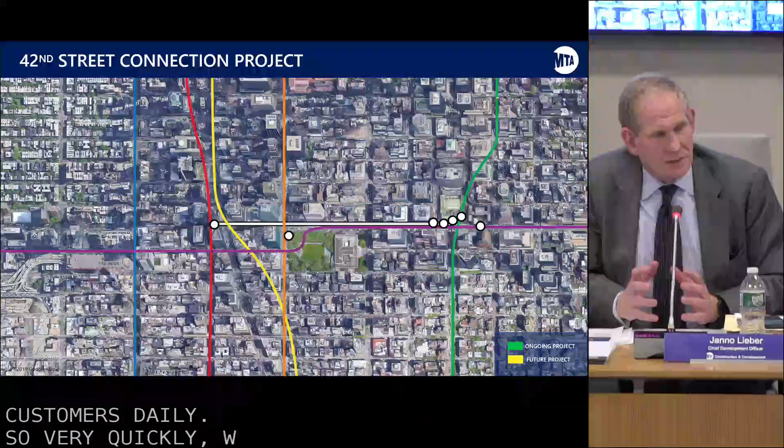So very quickly, what we did: obviously the Times Square shuttle is a centerpiece of this effort, making sure that it can become ADA accessible and can carry more passengers, and that we can deliver all of that without making it unusable in the meantime, which is a bit of a challenge because it is so heavily used every day. And in Grand Central, where there's a real problem of vertical circulation, both from mezzanine to platform and from street to platform and street to mezzanine, in every case we're getting significant additional capacity in vertical circulation, including several additional fare arrays.

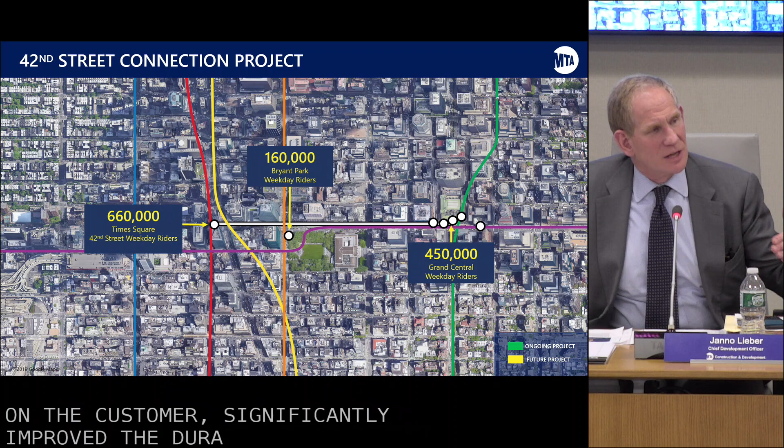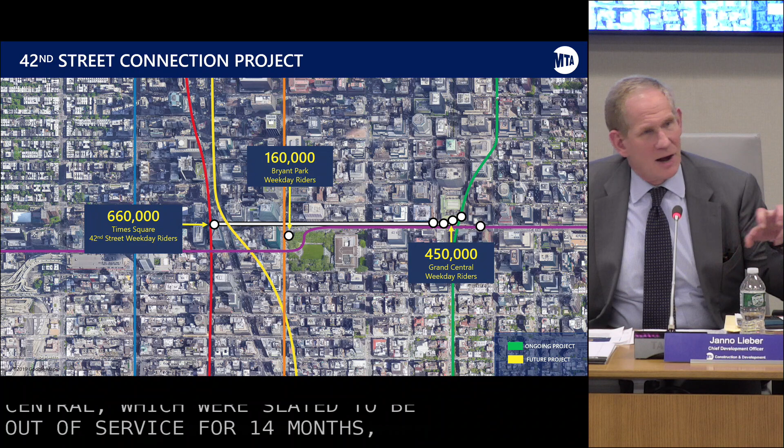So we're going to show you all the details, and one thing we're proud of, and hope we'll be able to replicate again and again, is that we took a project with a lot of different components and managed to cut back key elements by an average of 30 to 40% in duration. We saved a little money, but equally important, because of the impact on the customer, we significantly improved the duration. One element is that the escalators coming out of the 42nd Street Passage in Grand Central, which were slated to be out of service for 14 months, are down to 8 months, and that entire stair configuration is being handled in a much shortened time.

It is disruptive right now, but it is being managed, and thanks to the folks at Transit, we've worked closely with Andy and his team. And with all that preliminary, I'm going to ask Mo Solomon to take it away, quickly.

Thank you, Janno. I'm going to recap some of the points you made really quickly and walk everyone through some of the projects. I'm going to start with the 42nd Street shuttle. Some basic facts about the shuttle: we have 100,000 customers riding the shuttle daily, and we connect east and west subway lines.

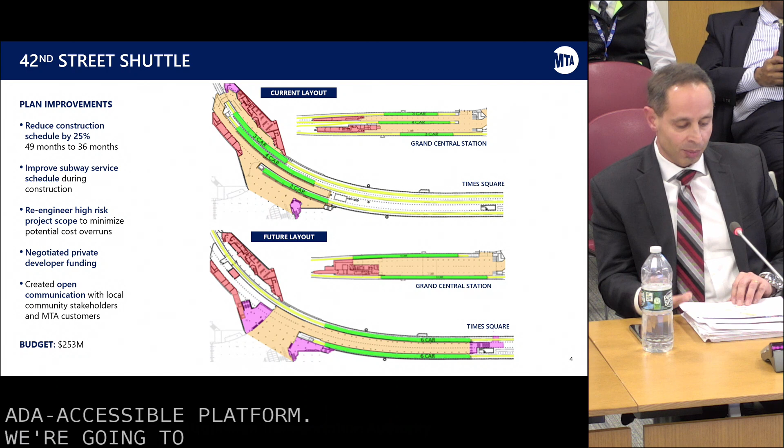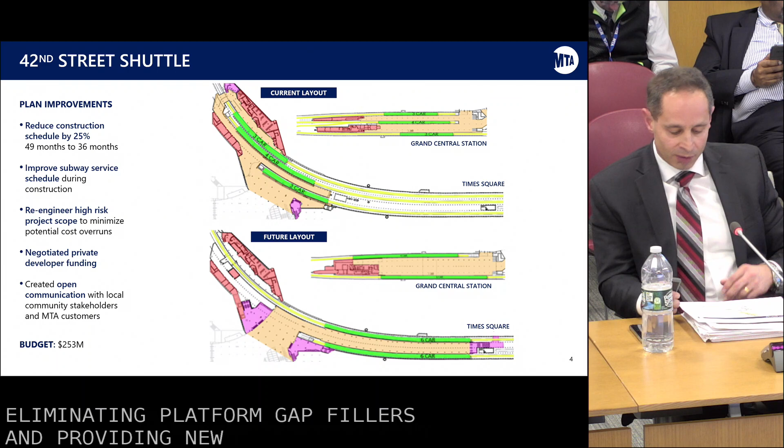Under the scope of this project, we are going to provide a new ADA accessible platform. We're going to increase subway car capacity by 20%, and we're improving system reliability by eliminating platform gap fillers and providing new rail systems. The project is currently underway, and we've improved the schedule by 25%. One of the key things we've done is re-engineer high-risk project scope, and we've negotiated a $7.5 million credit with the developer, something we're very pleased with. The project is currently on budget and on schedule.

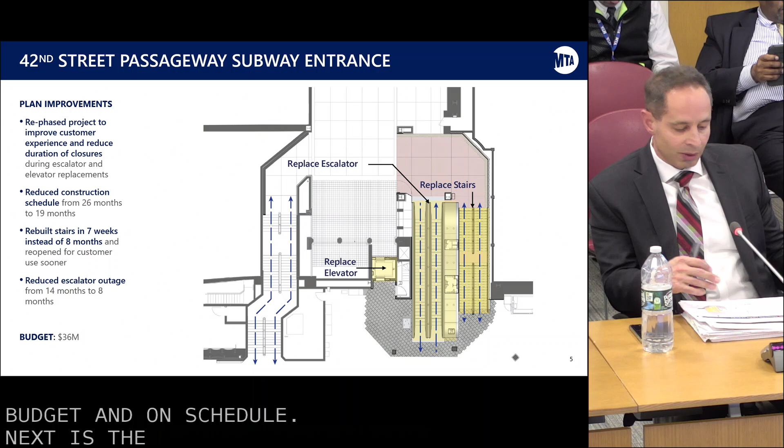Next is the 42nd Street passageway subway entrance. Another ridership fact, because this area is just very high volume: there are 180,000 customers that use this station entrance over by Grand Central on a daily basis. That is 60% of Metro North's entire daily ridership, so it's very high volume.

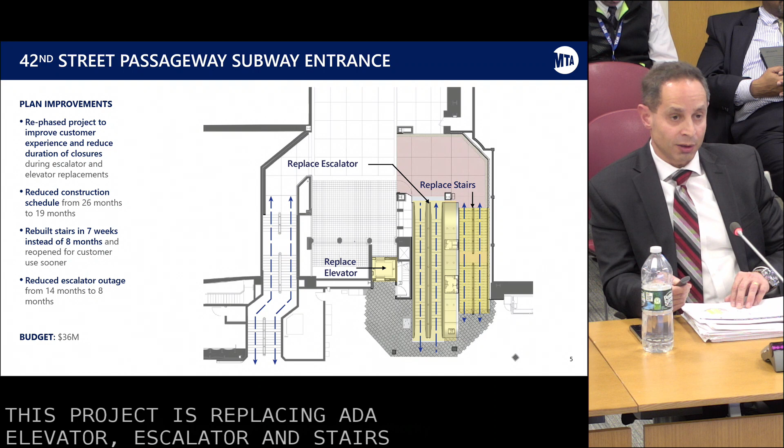This project is replacing ADA elevator, escalator, and stairs that have exceeded their useful life. Again, this project is also underway, and we've reduced the schedule by 25%. We've also reduced some of the phases of the project: we reduced the schedule phasing of the stairs by 75%, and we've reduced the escalator closure by 40%. The rephasing of the projects definitely improved customer circulation and customer experience.

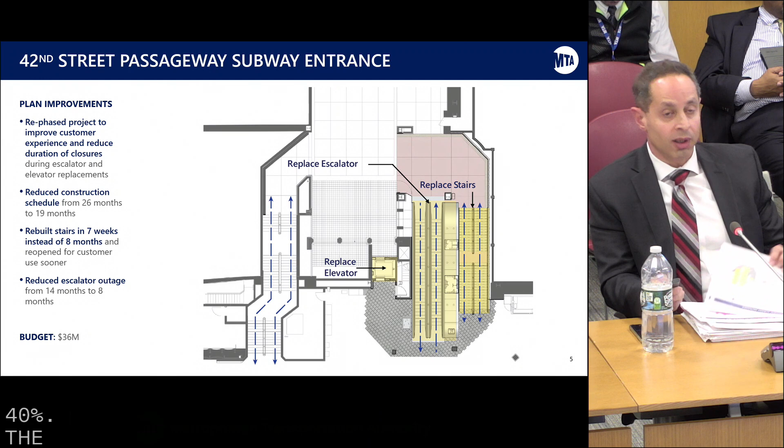That's literally the busiest entrance in our subway system. It's an unbelievably challenging location.

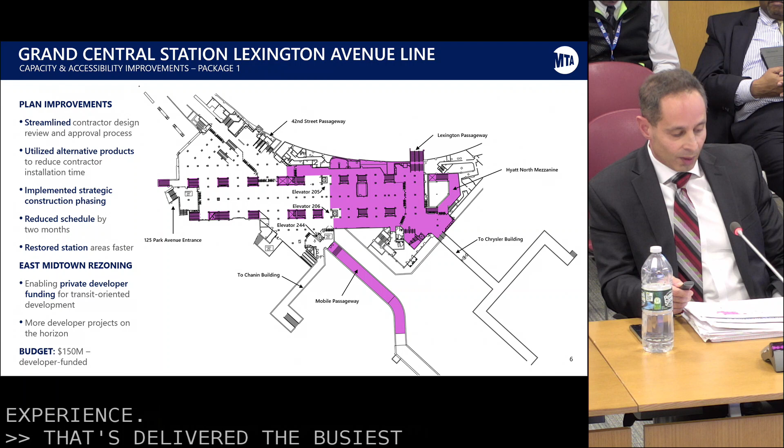Next is also at Grand Central Station on the Lexington Avenue line. We have an important developer-funded project providing much-needed capacity improvement to New York City Transit's second flagship location.

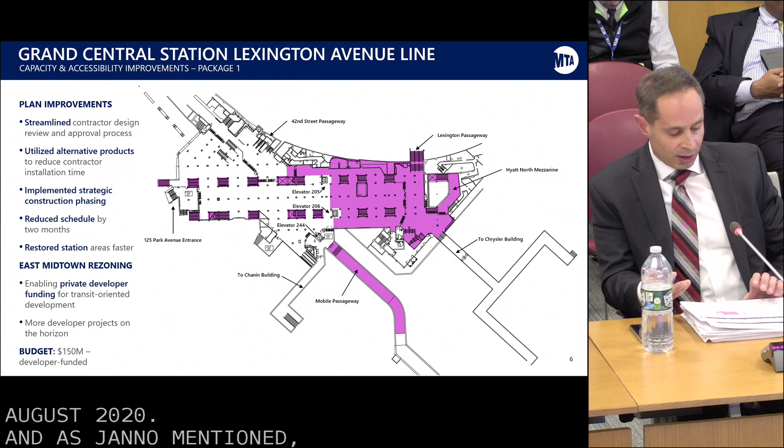As Janno mentioned, this project was made possible through New York City's East Midtown rezoning initiative, and there's more of that coming in this area.

Next is the other half of the Grand Central mezzanine. The One Vanderbilt project funded the north side of the mezzanine, and now we have a plan for the south side.

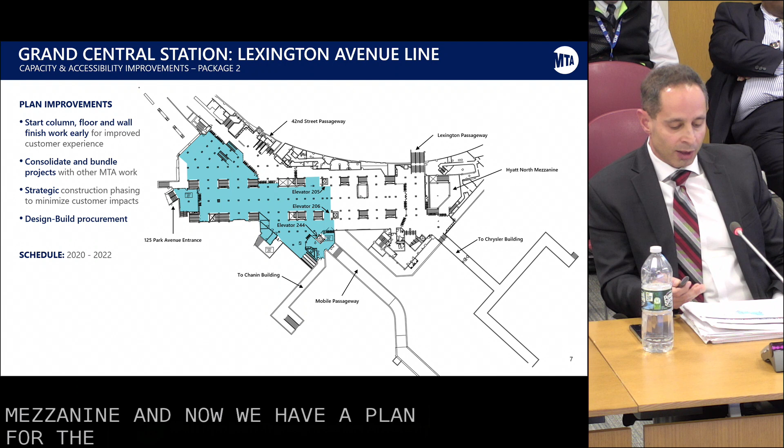We have an upcoming project to complete the work and transform this station into a world-class space. We're going to bundle that work with our overall connection project as part of our Better, Faster, Cheaper initiative.

We've already started this work. We've negotiated an agreement with the developer to rescope some of their program so that we can get the work going as quickly as possible.

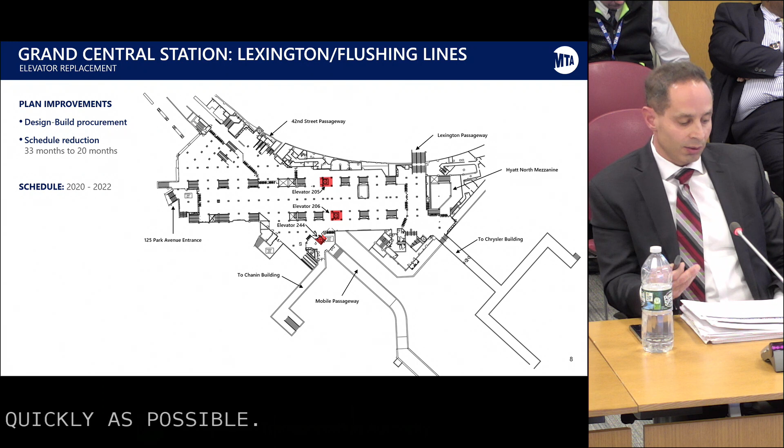At this same station, we're also going to replace 3 very important elevators. These elevators provide access to the Lex line platforms and to the Flushing line platforms. They're frequently used and need to be reliable.

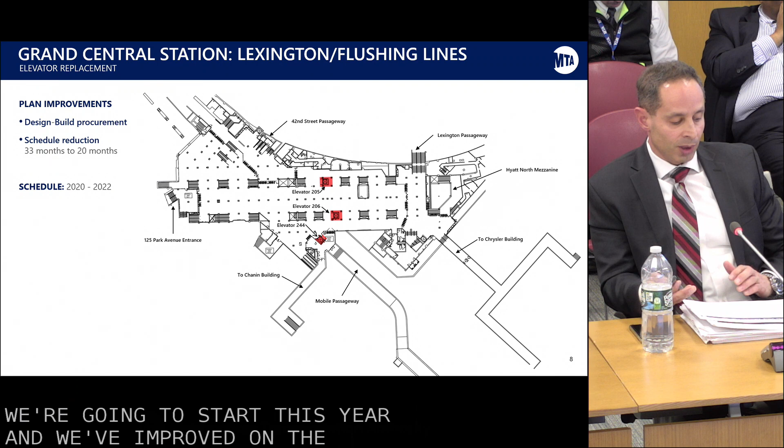They've passed their useful life, so we are moving very quickly to get these elevators replaced. We're going to start this year, and we've improved on the schedule significantly. Initially we had a plan for a 33-month construction schedule, which we've now compressed to 20 months.

Also at Grand Central is a very large, sprawling complex, and we're going to talk about the Flushing line. It's one of the busiest lines in the system, and 42nd Street Station is at or near capacity.

So improving vertical circulation is a top priority for MTA, maintaining good customer level of service now and in the future. We have a plan that bundles upcoming projects to widen existing stairs and build new ones so we can continue good level of service to MTA's customers.

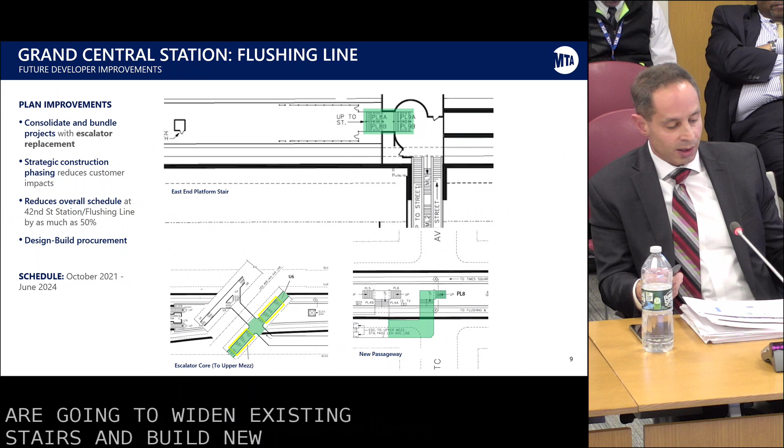Mention there's an elevator that went out of service there, which is hugely important, and we've accelerated the repair, right? Worth mentioning. Yes, that's correct. The one elevator that serves the Flushing line had a catastrophic failure back in the summer of 2019.

We moved quickly to get that elevator replaced, and we're going to have it completed by April 30 of 2020. That's the only elevator that serves the Flushing line platform on the number 7 train.

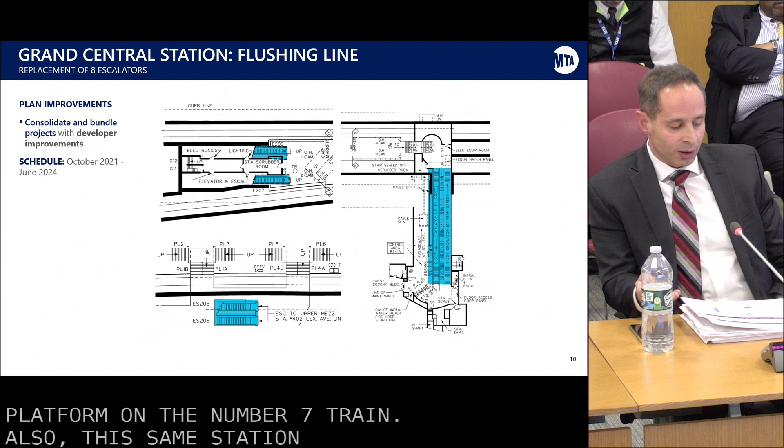Also, this same station has 8 escalators for passenger access. Because of the depth of the stations, passengers really rely on the escalators to get in and out. They're very critical at this location.

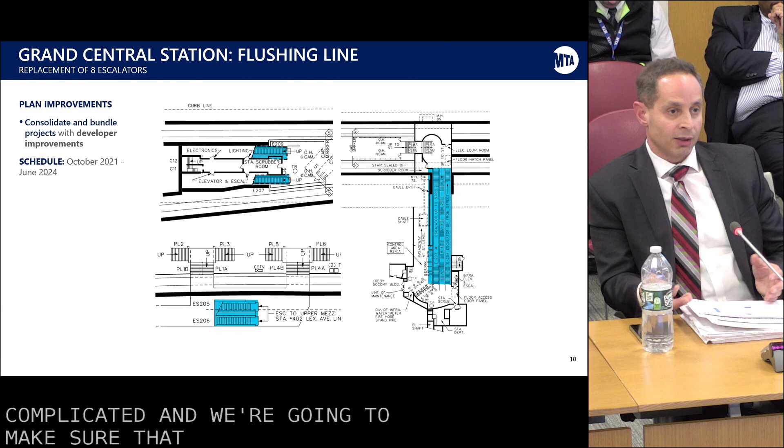So we're going to be replacing the 8 escalators that are almost at their useful life as part of our connection project bundling. The logistics of the escalator replacements are very complicated, and we're going to make sure we dovetail their replacement with the phasing of other key projects, especially the capacity improvement projects.

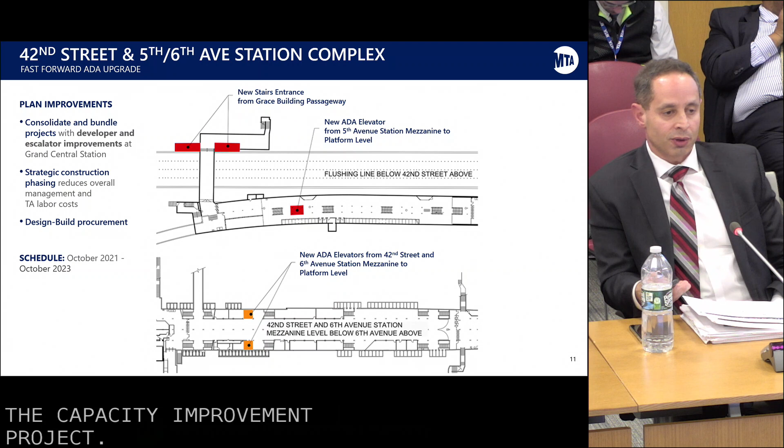Next is ADA improvements over at the 42nd Street, 5th and 6th Avenue Station Complex. This station is not quite as busy as Grand Central and Times Square, but there are 160,000 customers that use this complex on a daily basis.

Again, very high volume. We're going to make it fully ADA accessible. We're going to bundle it with the connection project, and capitalize on cost-saving opportunities with things like engineering force account and TA labor.

Lastly, you may have seen some of our new branding that went out last week. The branding is intended to provide customer-friendly and uniform wayfinding information. We've also been deploying MTA staff to provide assistance with wayfinding and crowd management, just as part of our approach to improving the customer experience.

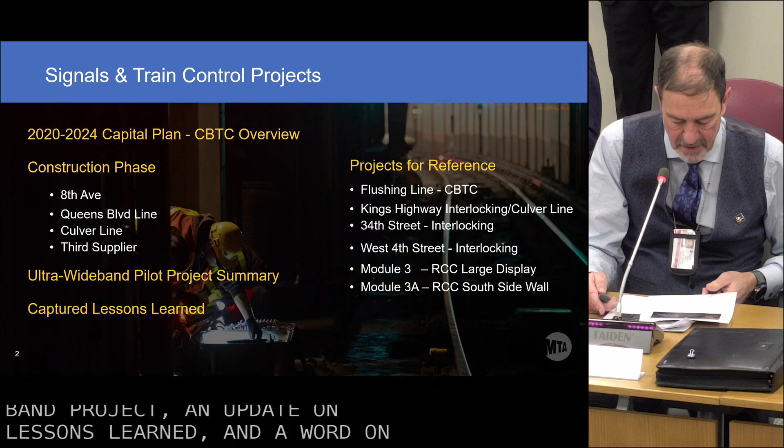Good afternoon, my name is Pete Tomlin, I'm the Vice President of CBTC Signals and Train Control Engineering for NYCT. This update will provide an overview of the 2020-2024 capital plan for CBTC, followed by updates on the 4 projects in construction, the ultra-wideband project, an update on lessons learned, and a word on the Flushing project in the closeout phase. There is additional information in the back of the pack under the projects for reference, but they're not presented here.

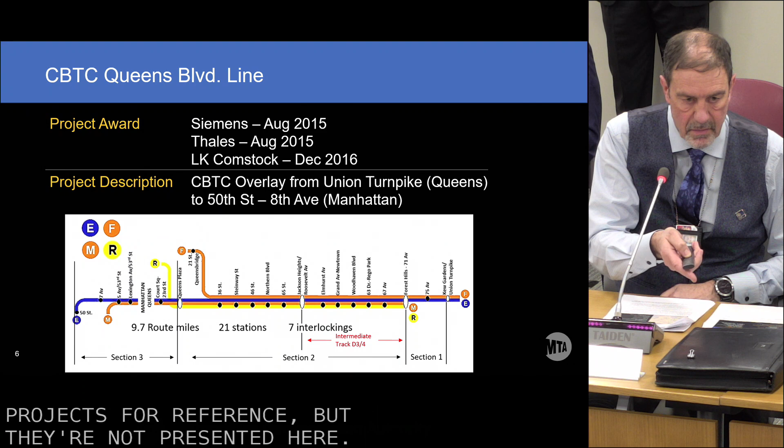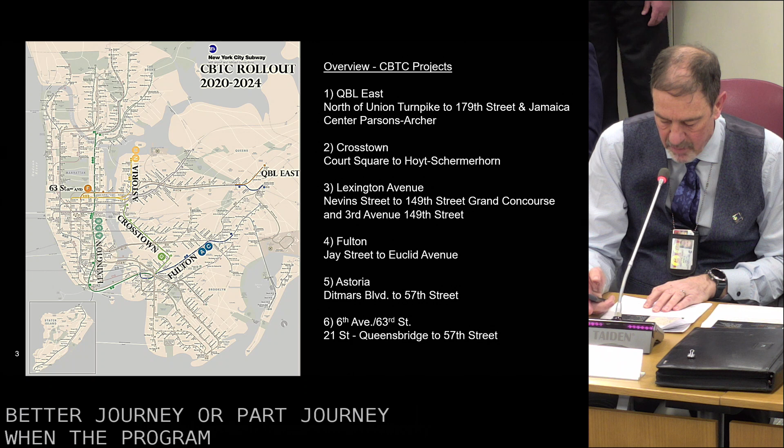The upcoming capital plan is the first major implementation of the Fast Forward plan with regard to signalling. The 6 corridors were strategically selected based on current capacity constraints and areas in need of urgent signalling renewal or state of good repair. It is expected that over 60% of our passengers will have a better journey or part journey when the program is complete. 47 of the 50 busiest stations on the subway network are covered under this plan. The subsequent capital plan starting in 2025 will bring the total line corridors upgraded to 15, with over 80% of our customers getting a better journey.

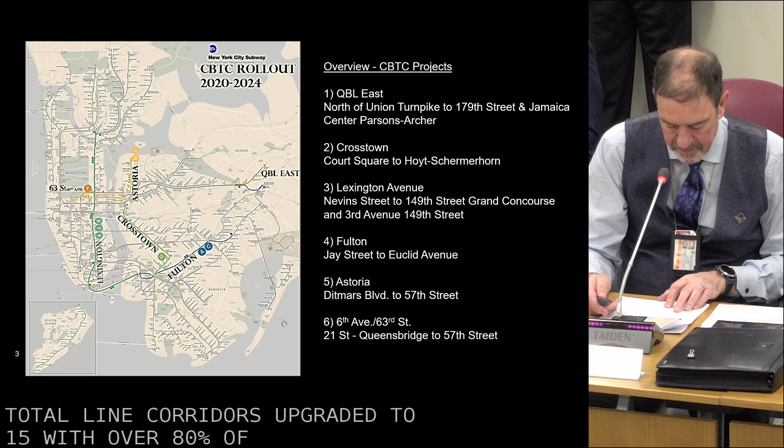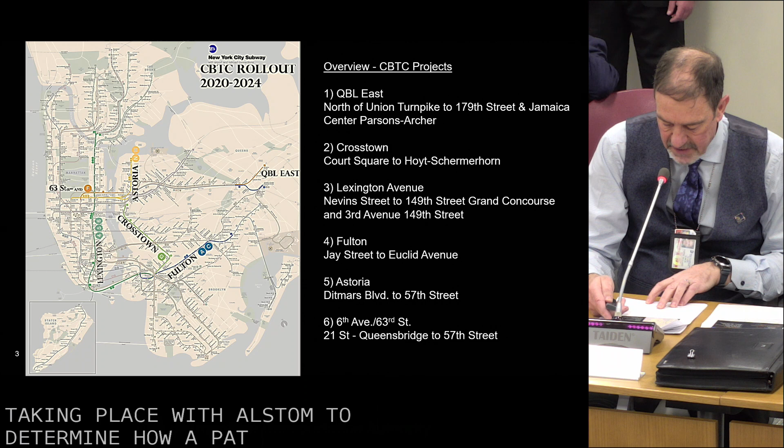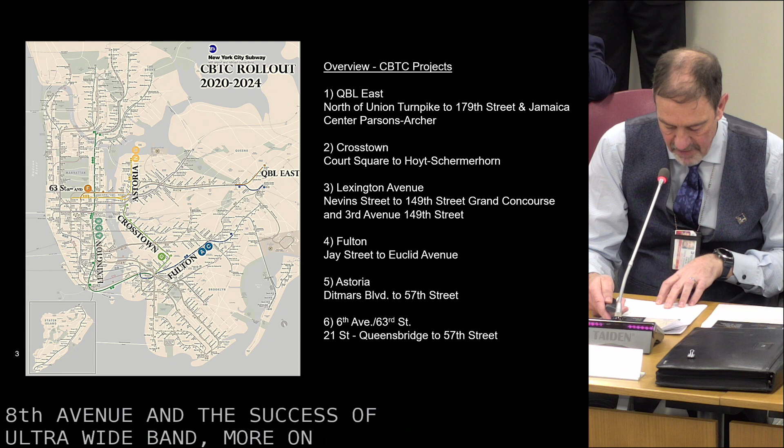This plan is the most ambitious resignaling program ever undertaken worldwide, against a backdrop of maintaining service for our near 6 million daily passengers, 24/7, 365 days a year. In support, Mitsubishi has been qualified as the third CBTC supplier, more on this later, and technical meetings are currently taking place with Alstom to determine how a path to interoperability certification can happen. Also, new innovative technologies — axle counters for 8th Avenue, and the success of ultra-wideband, more on this later — are being evaluated for use in this plan. Additionally, several other innovative technologies are being explored to see if or how they can support accelerating this plan. All of this is good news because the goal of this capital plan is to put 220 miles of track controlled by CBTC into passenger service, compared to the 43 miles over the last 20 years.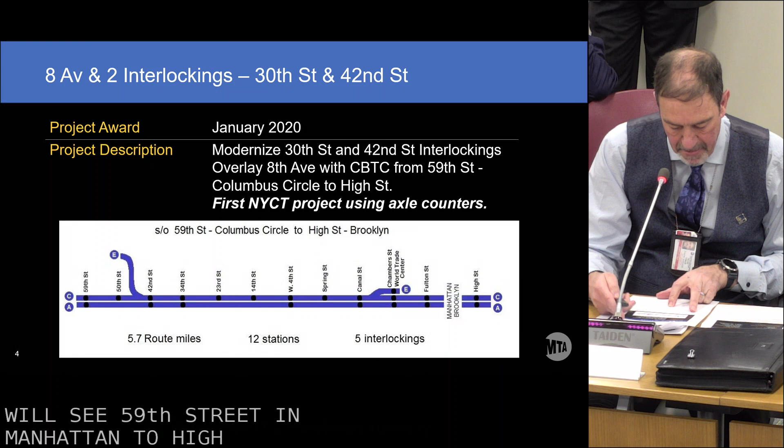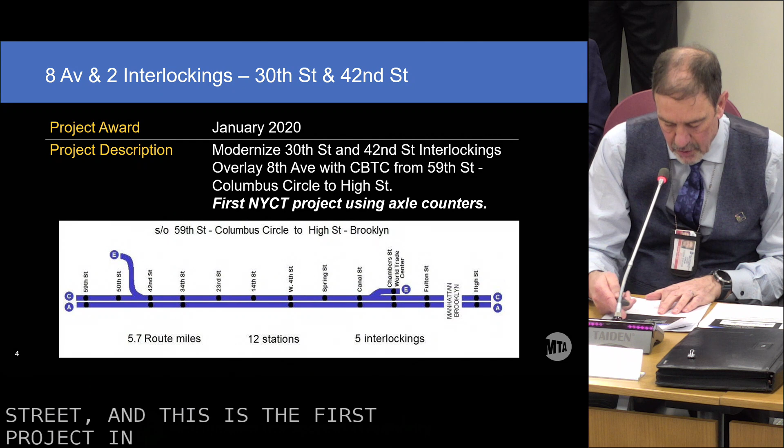The 8th Avenue project is an ambitious 60-month schedule that will see 59th Street in Manhattan to High Street in Brooklyn equipped with modern signaling technology. Also, as part of this near 6-mile-long project, 2 of the 5 interlockings will be upgraded at 30th Street and 42nd Street. This is the first project in New York to use axle counters. It was awarded to LK Comstock with Siemens as the CBTC supplier on the 11th of January this year.

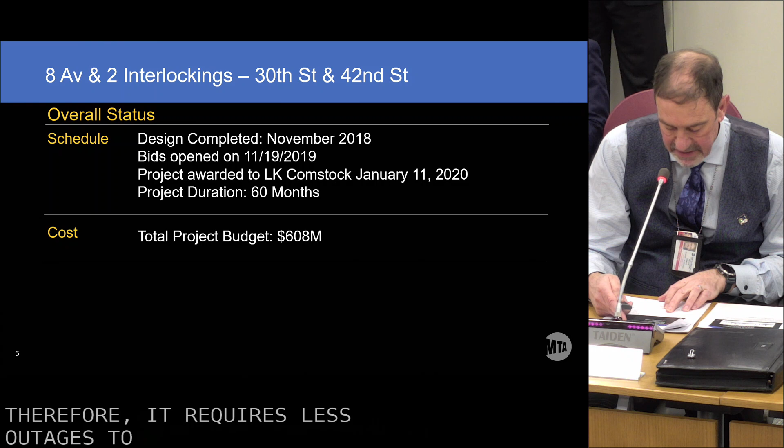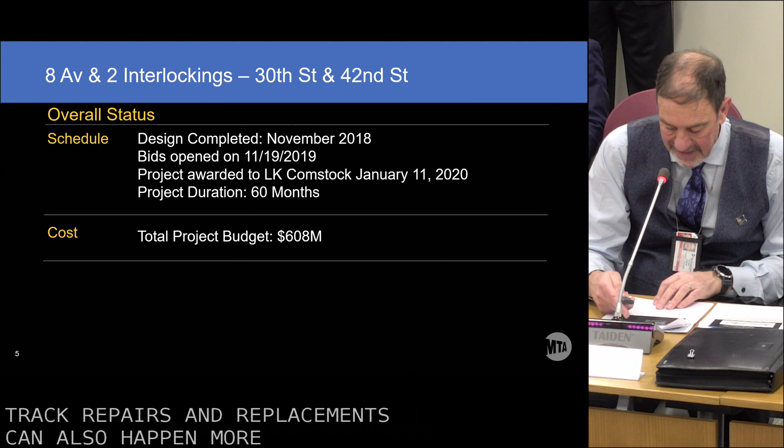The use of axle counters replaces the traditional track circuits. Axle counters help reduce delays as they use more resilient components, which are much less susceptible to water and debris. Installation is easier, less complex, and the time needed much less, therefore requires less outages to complete. This provides great savings in GOs and less passenger disruption. Track repairs and replacements can also happen more efficiently. These savings also flow down to lower the maintenance costs and lessen disruption from maintenance to our passengers.

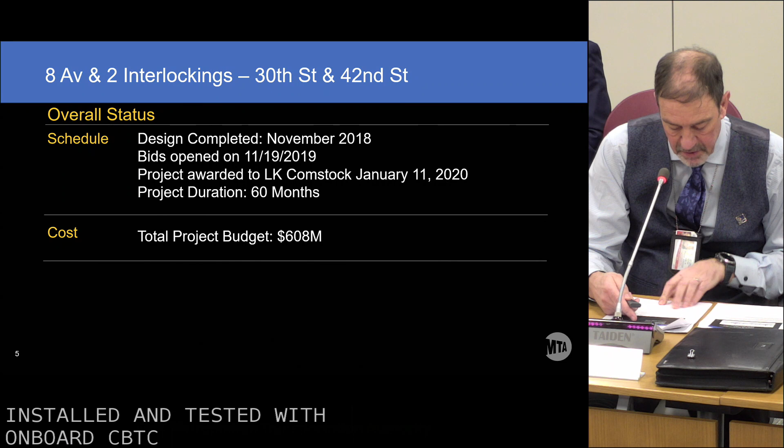The trains to support this project are the R211 Kawasaki trains that will arrive already installed and tested with onboard CBTC equipment, and the R179s already on property will be retrofitted with the Siemens onboard equipment as part of another direct contract to NYCT to support 8th Avenue. The schedules of the train deliveries and the wayside CBTC readiness are now all aligned.

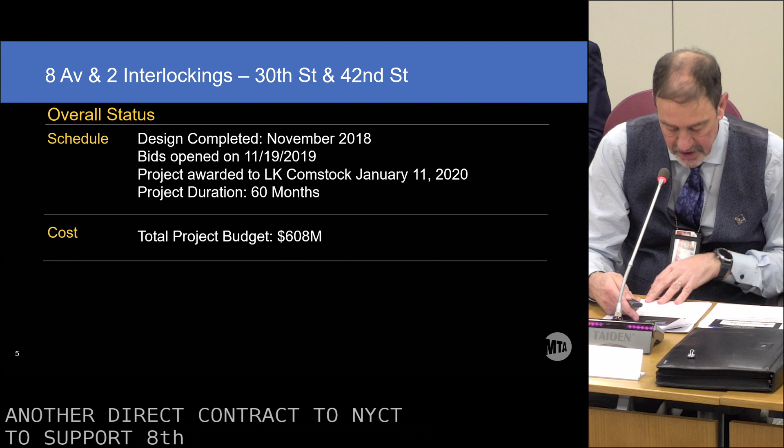Moving on to QBL West. This project is made up of 3 major contracts: 1 installer, LK Comstock, and 2 CBTC suppliers, Siemens and Thales, with Siemens being awarded 95% and Thales 5% of the CBTC portion to ensure interoperability.

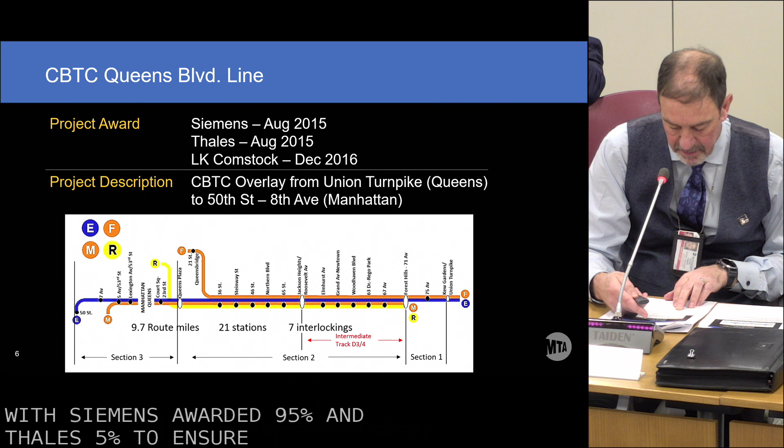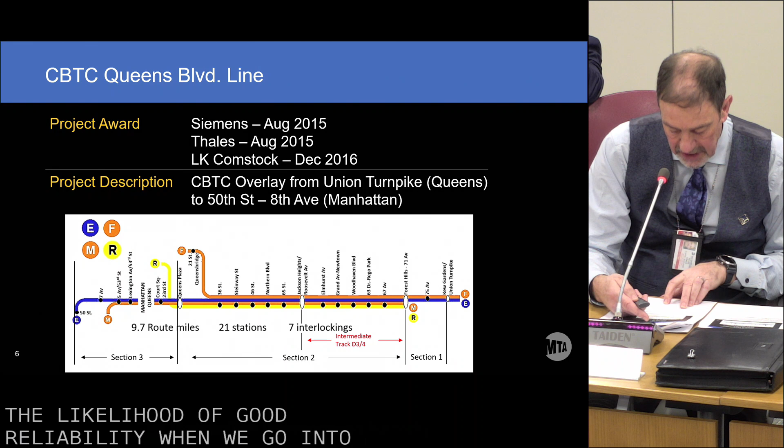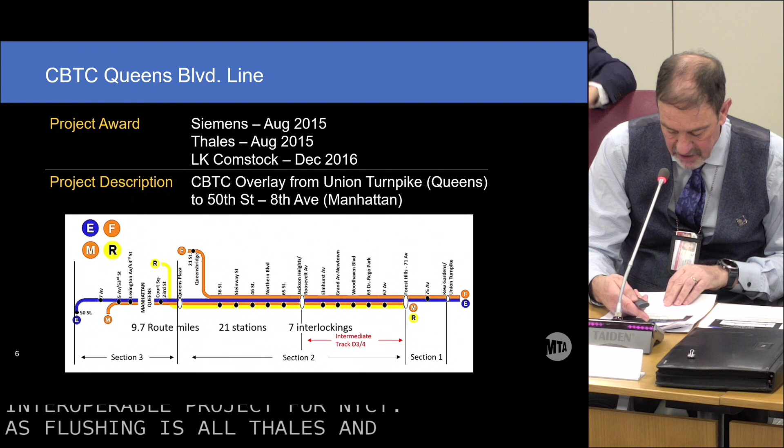It will effectively be put into service in 4 sections, with the intermediate section being first, shown in red. Because the intermediate express tracks are commissioned separately, this makes 4 sections overall. This approach increases the likelihood of good reliability when we go into service for the first time. This project is the first fully interoperable project for NYCT, as Flushing is all Thales and Canarsie is all Siemens. The intermediate section is on track to go into service in March of this year and section 1 in May of this year.

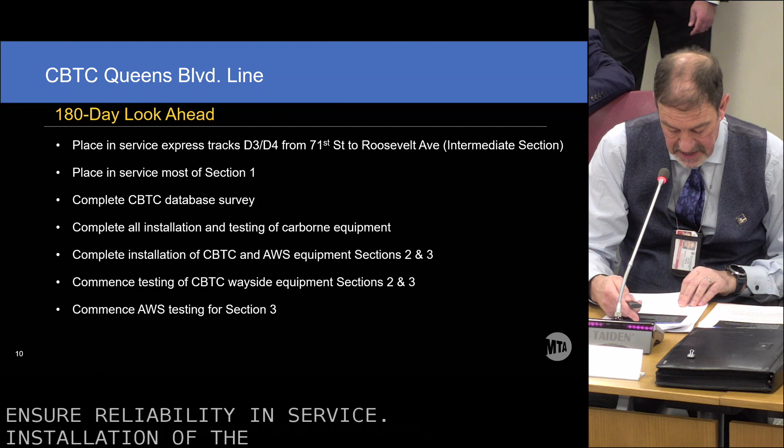All the planned work from the previous look ahead was completed on time. During the next 6 months, the intermediate section and Section 1 will be placed into service, and all remaining train units will be installed, tested and safety certified. We will continue to ramp up the trains in monitoring mode to ensure reliability in service. Installation of the AWS system in Sections 2 and 3 will be completed, and the CBTC testing will commence in both Sections 2 and 3.

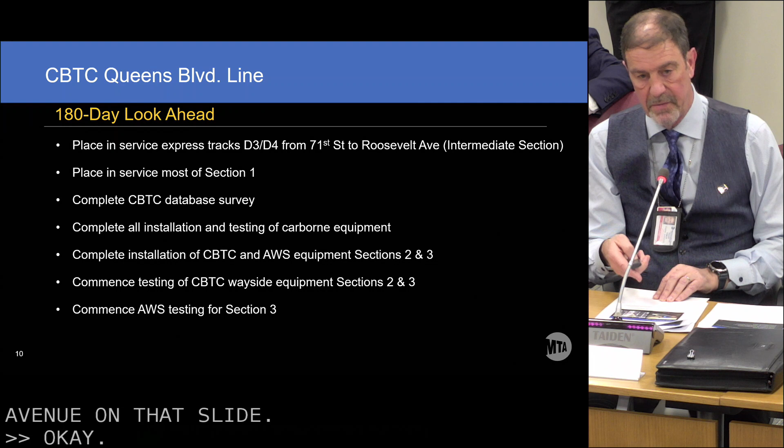Mr. Chairman, can you go back one slide? You're probably going to want to change 71st Street to 71st Avenue on that slide. Okay, sorry? Oh. Pardon? Oh yeah, okay, yes. My practice is when Andrew makes these suggestions, just to take them. He's always right. Yes.

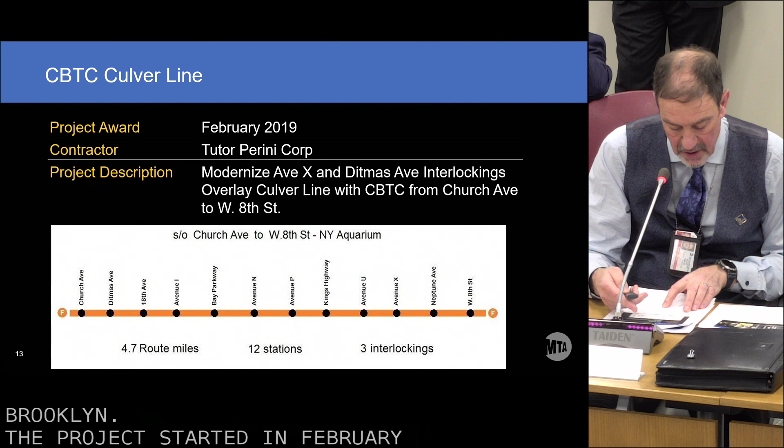Onto the Culver project. This was awarded to Tutor Perini, with Siemens providing the interoperable CBTC solution. The Culver Line project runs from Church Avenue to West 8th Street in Brooklyn. The project started in February 2019 and will be complete in August of 2022, a very aggressive 42-month schedule. No trains are required for this upgrade, as they will be equipped with CBTC under the QBL project.

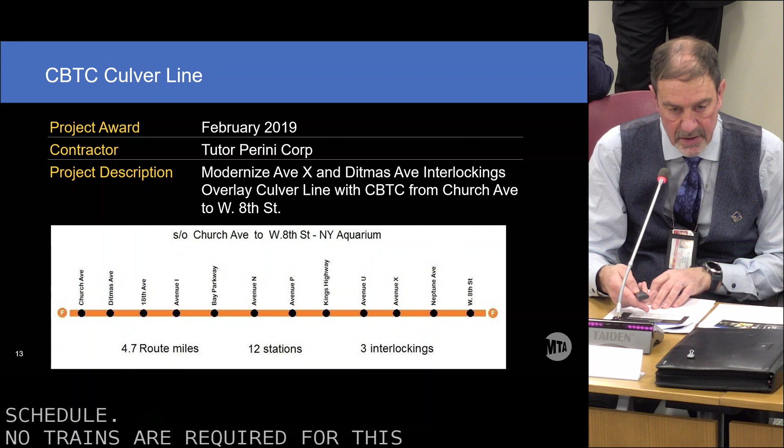With 10 months completed, the project is progressing well. Regular team and steering committee meetings were established that quickly resolve issues and challenges as they arise. Since NTP, a lot of construction work has taken place, and the project is very well on schedule.

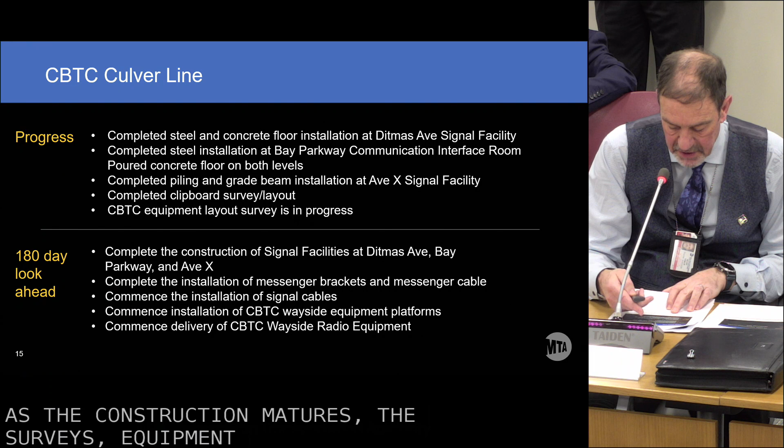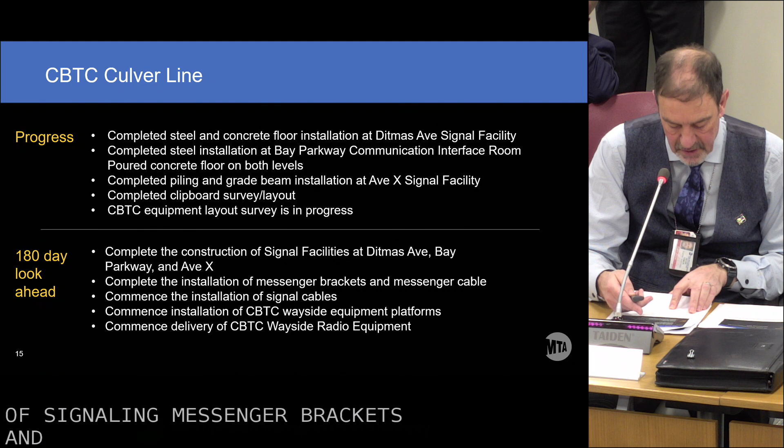As the construction matures, the surveys, equipment layouts and installation picks up. The next 6 months will see the completion of the new signals facilities and the installation of signaling messenger brackets and cables. Installation of the CBTC wayside equipment platforms also starts. Delivery of the wayside radio equipment for the DCS will also de-risk later schedule activities.

There are no issues to report on this project. These pictures give a good insight to the scale of construction work achieved since NTP.

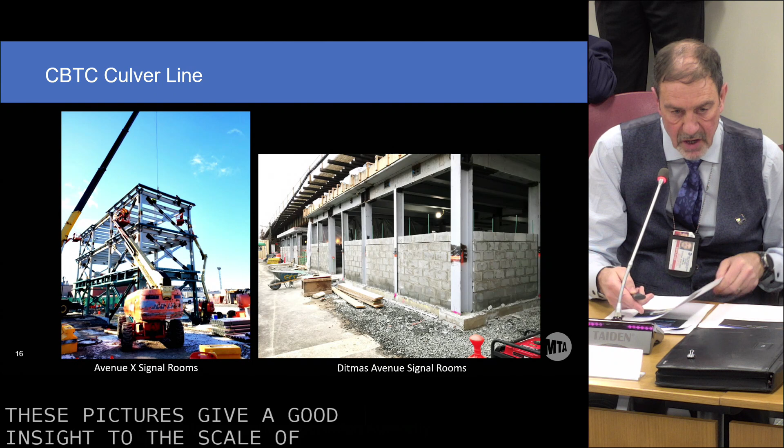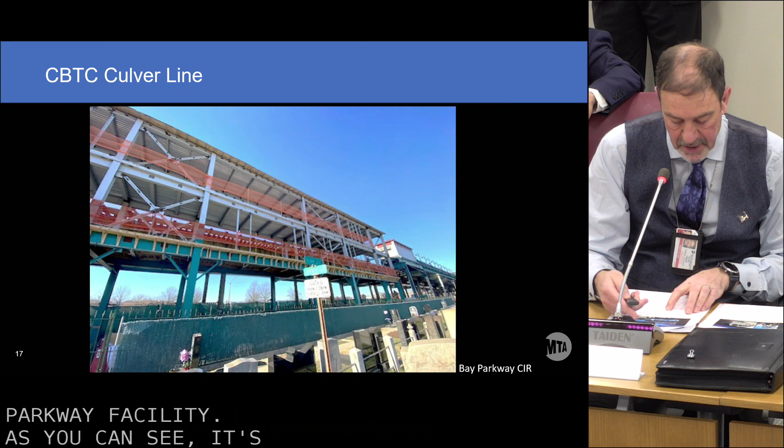This work includes relay rooms, fire suppression, rooms for batteries, mechanical equipment, communications equipment, and electrical distribution rooms, and of course, signaling equipment.

The ultra-wideband project awarded us 2 projects in March of 2019, one on the Canarsie line with Siemens and Humatics, and the other on the Flushing line with Thales and Piper. They both cover about 4 miles of track. The goal of both projects was to determine whether ultra-wideband as an integrated part of CBTC system is safety certifiable.

Formal safety certification now follows for these projects, as well as an evaluation of where they might intersect with the resignaling program in service. As a reminder, ultra-wideband is not a CBTC system in itself. It is an odometry system that determines position, speed, and direction of the train, but it can replace the entire existing CBTC positioning system on the train, as well as all the transponders and the beacons on the wayside.

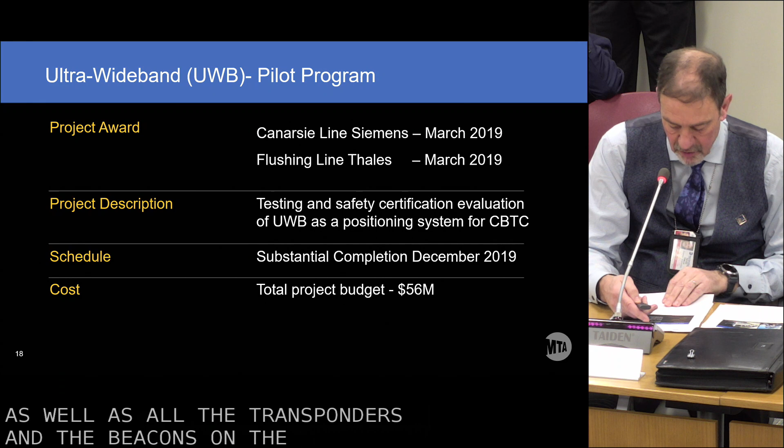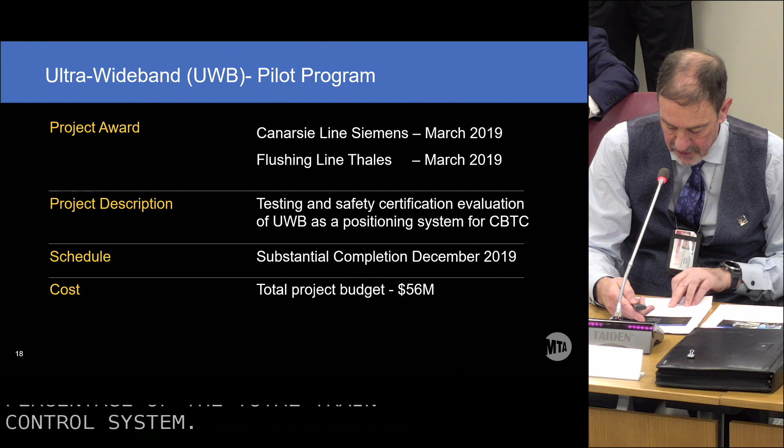For context, in terms of software, the ultra-wideband accounts for less than 1% of the total train control system. Both shadow mode data collection for safety certification and functional testing to confirm operation and reliability were completed in 2019. 9 months from awarding the contracts, these 2 projects were substantially complete.

This is a great achievement for the one team. These projects also used a different project execution model, with suppliers, consultants, in-house staff working very closely and collaboratively as one team to deliver the project.

From the start of the specification and schedule definition to notice of award for 2 contracts was 9 weeks. Baseline schedule approved in about 5 weeks. The average submittal reviews were about 5 days. And the design was completed in approximately 3 months from the notice of award. Installation was successfully completed by in-house forces.

Additional stretch targets such as potential worker safety at track and onboard train networks were also demonstrated. The next few months will see the completion of the data collection and conclusion of the options being exercised. All have shown very good possibilities to date. And it is worthy of note that we had 2 projects progressing quickly in parallel.

These projects were extremely well executed and demonstrate what is possible working together. This is on top of the strong technical results achieved.

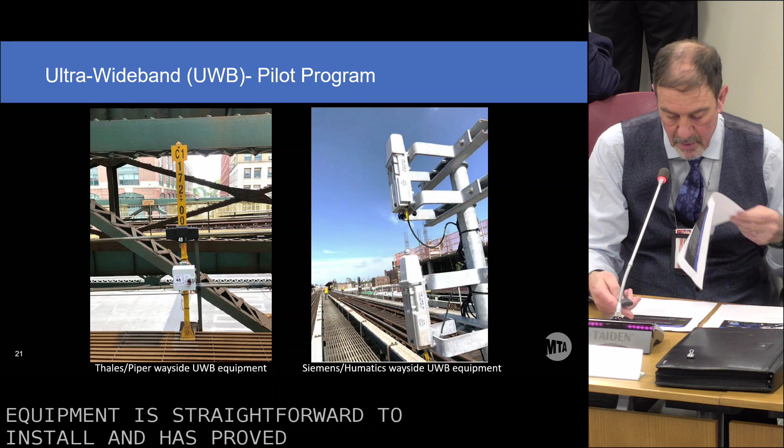Moving on to the third supplier qualification, Mitsubishi. Since September of 2015, Mitsubishi have been developing and testing their new CBTC solution to become the third supplier to NYCT for interoperable CBTC solutions.

Conditional approval allows Mitsubishi to bid on upcoming capital projects, even though substantial completion has not been achieved. There is now a certainty that Mitsubishi will qualify to a firm schedule and do so by April 2020. This will increase the competition for CBTC with Thales and Siemens.

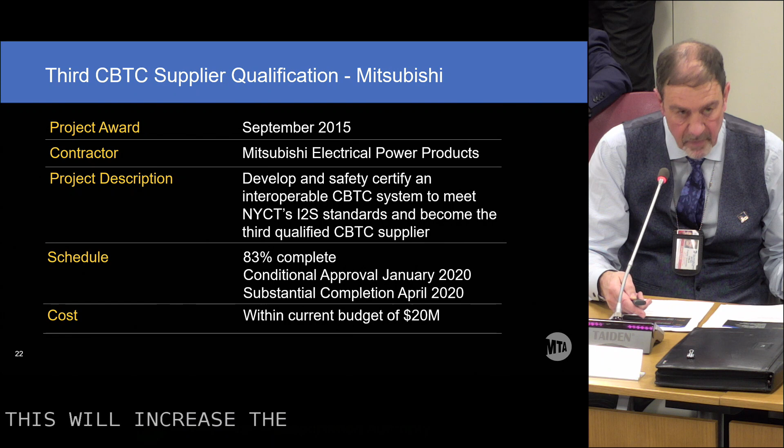All goals in the previous period have been achieved, and I'm very pleased to report that NYCT has granted full qualification to Mitsubishi for their carborne controller and conditional approval for their zone controller. This is a monumental achievement that cannot be overstated in what it brings to our subway system, given its complexity and all parties working together.

It's a testament to the hard work, the great management and good governance of the one team made up of Mitsubishi, supported by Siemens and Thales, and overseen by NYCT with our consultants. Within the next 6 months, full certification will be achieved and this project will be closed out.

Moving on to lessons learned and best practices. At the last CPOC, the chairman asked that lessons learned during the execution of the Flushing Line project be used in future CBTC projects planning, such that mistakes made on Flushing were not repeated.

Resignaling projects are known for their complexity and their implementation spans multiple years. This makes it difficult to track and record all the points that must be considered for the next project. It is therefore important to have a mechanism to capture not only lessons learned but best practices too, and to ensure the process becomes ingrained as part of how projects are planned and executed, not just one-off reviews from time to time.

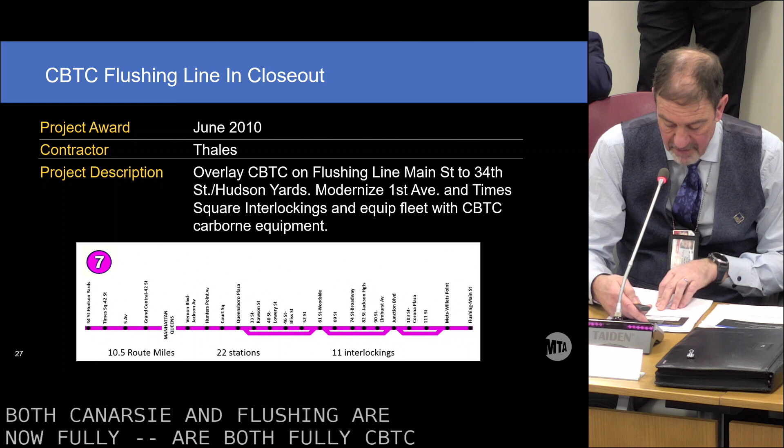Both Canarsie and Flushing are now fully CBTC. They're by far the best performing lines in the system, demonstrating that we have lots of improvements to look forward to as Fast Forward rolls out CBTC across the network at an unprecedented rate.

The transponder issue with snow and slush in December of 2019 that caused disruption to our passengers has been fully resolved. Special covers have been replaced on 560 of the 580 transponders, and new software has been installed to be much more tolerant of positional uncertainty. We have a very high degree of confidence that this issue is completely resolved.

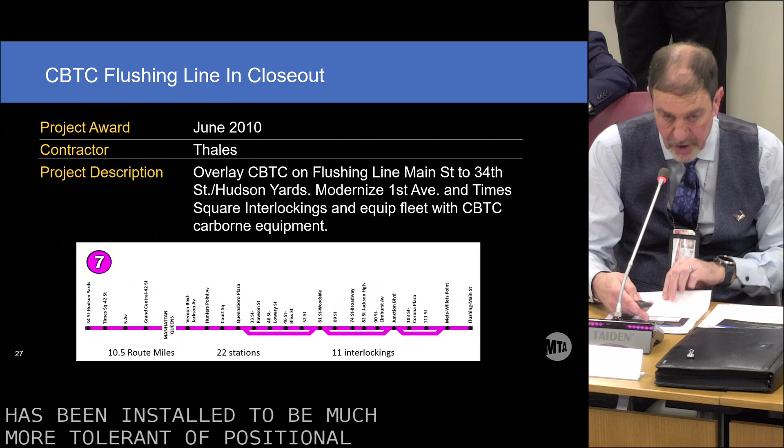Over the previous period, many training courses were completed, software releases put into service, and all spare parts delivered to NYCT. The next 6 months on Flushing will see the completion of the punch list work, final fix software releases, and removal of all the old signaling equipment.

This concludes my presentation. So, Pete, good report.

Before we go to the IEC, I just want to note three things. There's lots of good news in there. First, the qualification of a third supplier, Mitsubishi, incredibly important, bringing more competition. Second, the first use of axle counters, which is innovative. And third, the ongoing UWB pilot program, which I think is good news all around.

I'll call on Chris Adams from the IEC to comment on Pete's presentation.

Good afternoon, Mr. Chairman, thank you. The IEC presentation commences on page 56 in the book. Our report will be addressing 3 active projects under construction in the Signals and Train Control Program.

CBTC Queens Boulevard line: the project has expended the budget for TA labor, and the IEC is in the process of identifying the reasons for the overruns and will review and comment on the project's request for budget increases when available. The IEC did observe that repeat testing in the intermediate section contributed to the need for additional TA labor.

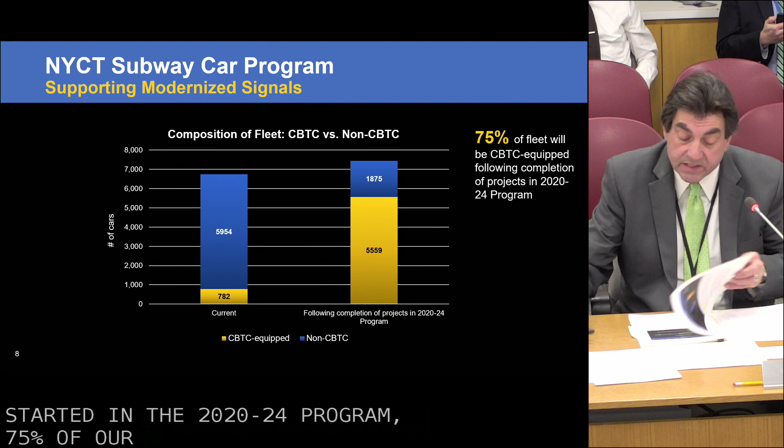On to the R211. This contract will provide up to 1,612 new cars for NYCT and Staten Island Railway. These cars will replace the R46 fleet from NYCT's B division and the Staten Island R44 fleet, both of which are over 40 years old. The R211 fleet will expand the CBTC-equipped subway car fleet to enable significant expansion of CBTC on the B division as part of the 2020 through 24 capital program. The R211 fleet will include up to 597 additional cars to provide for future service growth, including cars on the next phase of the 2nd Avenue subway.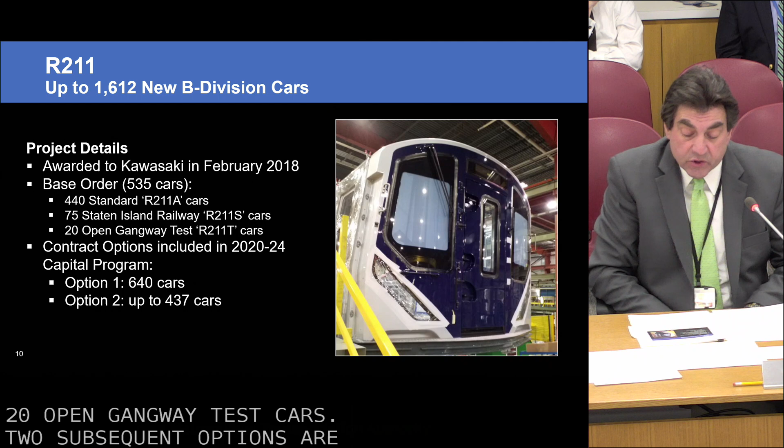The R211 contract was awarded to Kawasaki in February 2018 with a base order of 535 cars, including 440 standard cars, 75 Staten Island Railway cars, and 20 open gangway test cars. 2 subsequent options are included as part of the 2020 to 24 capital program. These options can be exercised for either standard or open gangway train sets, contingent upon our successful validation of the open gangway in the New York City subway system.

Option 1 includes 640 cars, anticipated to arrive between 2023 and 2024. NYCT forecasts exercising this option in the first quarter of 2022, with the decision for an open gangway configuration to be made later in 22. Option 2 includes a quantity of up to 437 additional cars for fleet growth based upon future ridership and service projections. We forecast exercising this option by the fourth quarter of 2023. Under these options, the rate of car delivery will be accelerated by Kawasaki from 30 cars per month in the base order to 40 cars per month.

The R211 project continues to advance at an ambitious but achievable pace in support of the project's aggressive production and delivery schedule. Critical design reviews have been completed with subsystem qualification testing in progress.

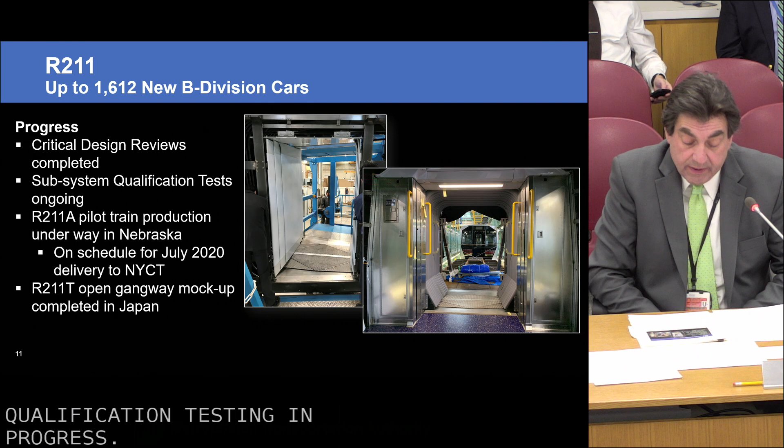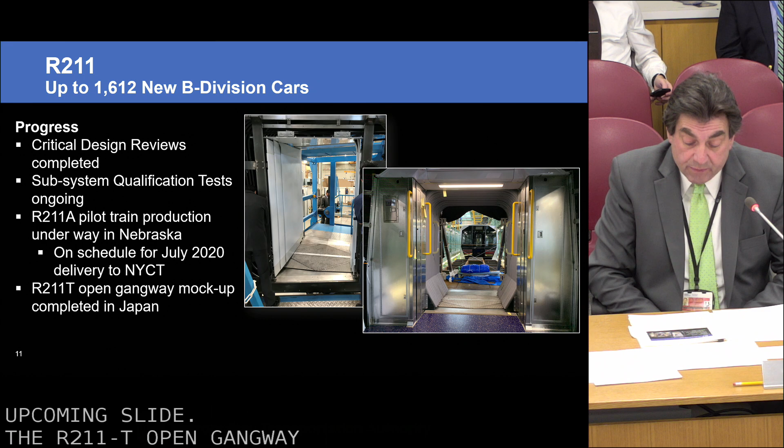The R211A pilot train is currently in production in Nebraska, which will be discussed in more detail on the upcoming slide. The R211T open gangway mock-up was completed in Japan earlier this month, as illustrated here, with both the bellows and hardwall designs shown. This is the mock-up itself in Japan.

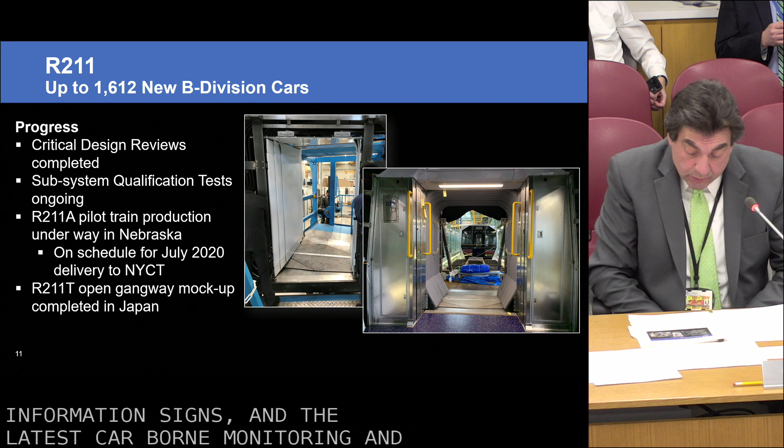In addition, the agency's goals for safety, reliability, and sustainability are embedded into the R211 design with features such as CCTV, video network recorders, enhanced customer information signs, and the latest carborne monitoring and diagnostic tools, all embedded into an Ethernet network backbone. The R211 will be the first CBTC installed car, meaning that the onboard CBTC equipment was delivered, installed, and tested by the car builder prior to reaching NYCT.

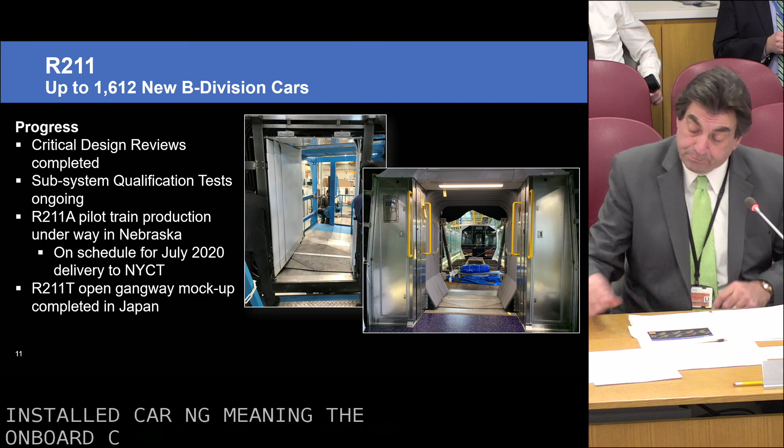We remain on schedule for the delivery of the R211A pilot train in July 2020. Current project activities include system qualification testing on brakes and aux power. The pilot train will undergo extensive qualification tests in anticipation of production car deliveries beginning in October 2021.

The base order is scheduled for completion in 2023, with subsequent options that are anticipated to continue deliveries to the year 2025, as detailed earlier.

The R211T open gangway test trains remain on schedule as well for delivery to New York City Transit in May of 2021. Current project activities include endurance tests and critical design reviews on crash energy management. The R211S Staten Island train also remains on schedule with a December 2021 delivery.

Here are a few photos of the R211A pilot cars under production in Kawasaki's Lincoln, Nebraska plant. On the left, installation of CBTC and communication system wiring can be seen as you're viewing the cab end of an A car. On the right, air duct installation has been completed for a roof-mounted Mitsubishi HVAC unit.

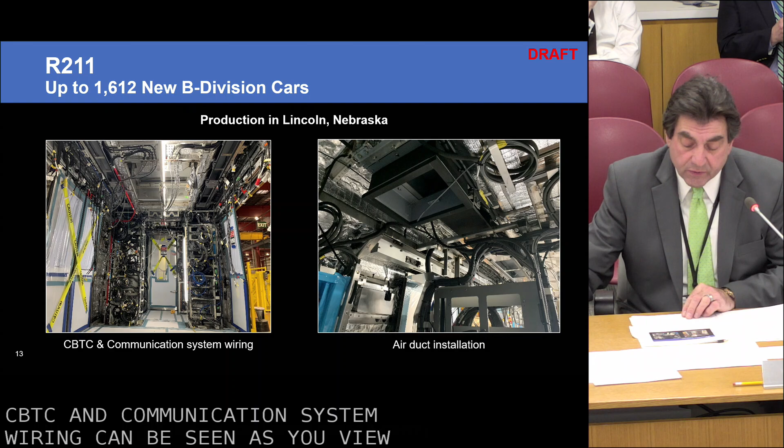Moving on, the R262 project is for the purchase of over 1,360 new A division cars to replace the aging R62 and R62A fleet, providing CBTC equipped cars to operate on the Lexington Avenue 4, 5, and 6 lines, as well as the Grand Central Shuttle.

This procurement will also expand the A division fleet by up to 225 cars, which is aligned with the Signal Modernization Program. The base order and the first option of the R262 purchase will be funded in the 2020 through 24 capital program, with the second option funded in the subsequent capital program.

The RFP authorizing resolution for this contract will be submitted in a future board package. Pending board approval, we are targeting the issuance of the RFP within this quarter and project to award the R262 contract in early 2021. The R262 technical specification is based on the R211 design, but also includes the following features:

Additional requirements for a condition-based maintenance system, updated and enhanced cybersecurity requirements, audio induction loops for hearing impaired customers, and speech-to-text capability.

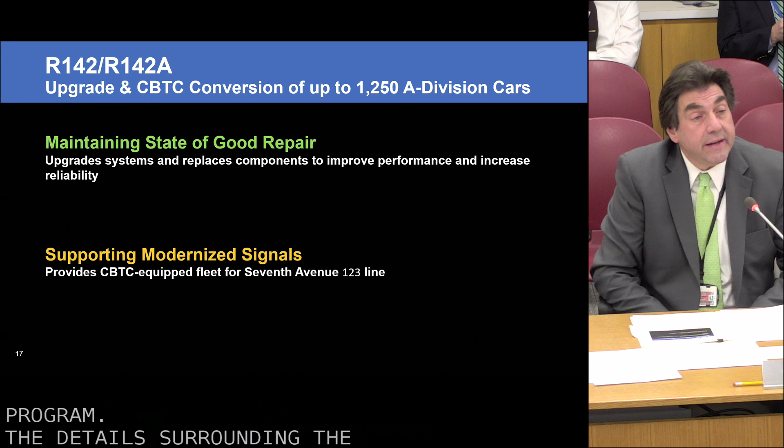This concludes my report on the subway car capital program.

Questions, comments? All right, terrific. IEC, please, on cars. Thank you, Mr. Chairman.

The IEC report on 179 and 211 rail procurements can be found on page 81 of your CPOC book. Regarding budgets, after reviewing the project expenditures, change orders, and program contingencies, the IEC finds the EAC remains within budget of $744 million since last report.

The R179 schedule review: the IEC verified that the fleet delivery was completed in December 2019, 3 months later than last reported. This was largely due to quality production and technical issues, including part shortages.

The R179 observations, as stated by the agency: 2 vehicles experienced door problems while in service. A root cause analysis report is being finalized, and the IEC will review this report once it's made available.

R211s: based on the project cost review, there have been no changes to the budget since the original EAC was established. The project is in its early stages, and changes should be expected. There will be some consumption of the contingency as it progresses through design, testing, and production phases.

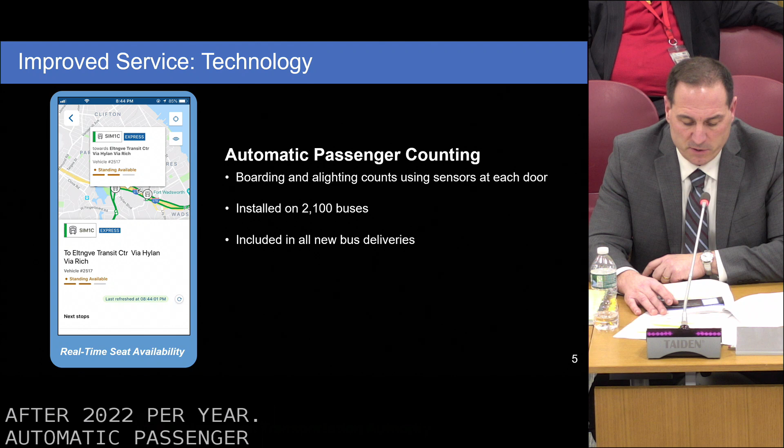Automatic passenger counters provide real-time ridership and loading information, allowing for improved service management and customer information. By the end of this capital plan, 90% of the fleet will be equipped.

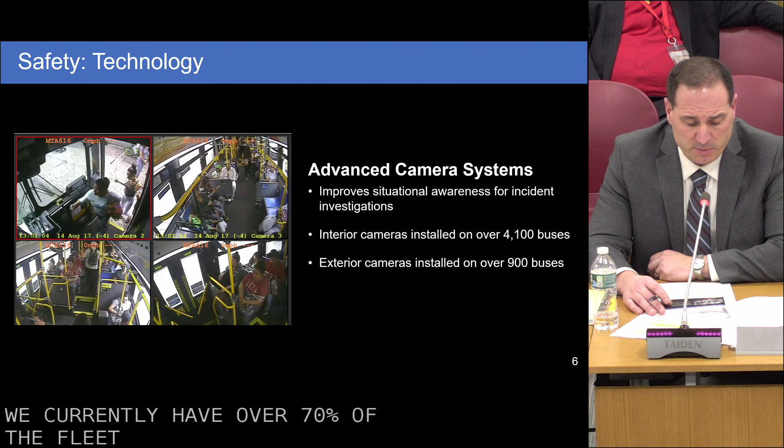We currently have over 70% of the fleet equipped with cameras in the interior of the bus. In addition, we also now have exterior cameras. All new buses come with these systems, and the entire fleet will have interior cameras by the end of this capital program.

We recently introduced backup cameras to the fleet, and all new buses will be equipped with this technology.

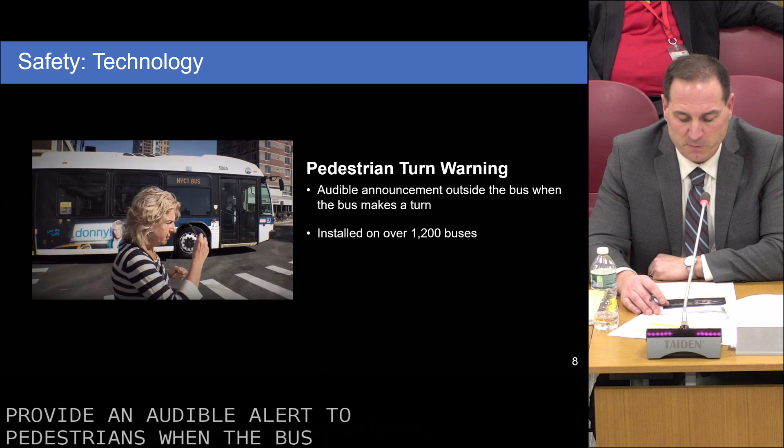Pedestrian turn warning systems provide an audible alert to pedestrians when the bus is turning. All new buses come with this technology, and 85% of the fleet will be equipped by the end of this new capital program.

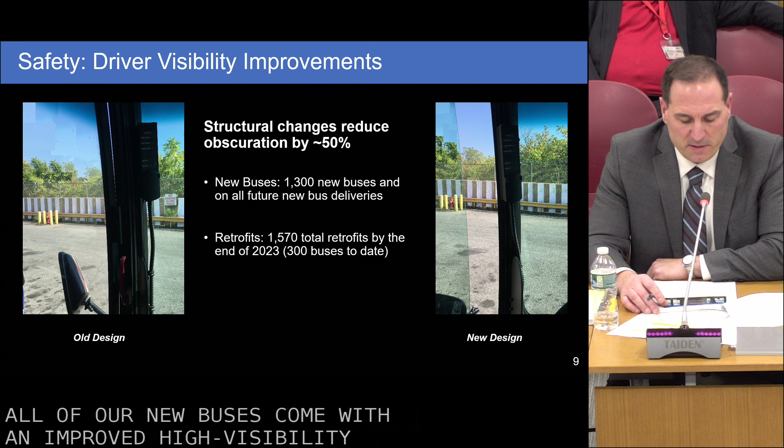All of our new buses come with an improved high visibility design. At the end of the 20-24 capital program, 92% of our local transit buses will have high visibility improvements.

We are fully committed to transitioning to a zero-emissions bus fleet by 2040. Battery technology, charging protocols, life cycle, and bus range are some of the important design aspects and standards on which we are driving this industry.

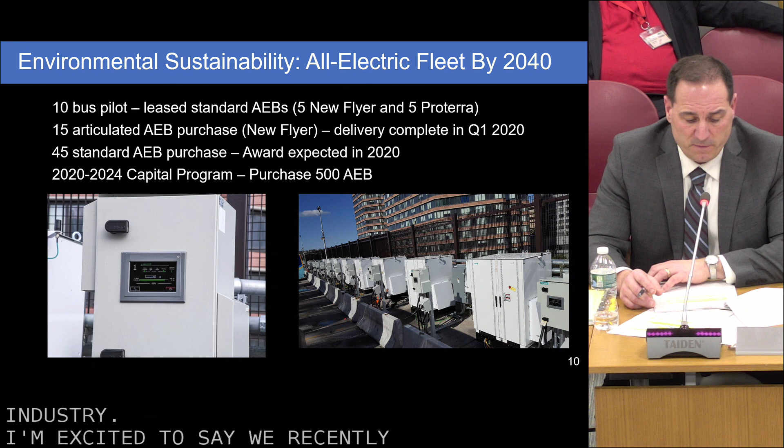I'm excited to say we recently began delivery of the first MTA-owned all-electric 15 articulated buses on our journey to a zero-emissions fleet. Delivery of these buses will be complete in March. We currently have 5 of these deployed on the M14.

We expect to award a contract for 45 standard all-electric buses, with an option for 30 more, at the end of this year. These buses will operate in all 5 boroughs of the city and eliminate 70 tons of carbon dioxide per bus per year.

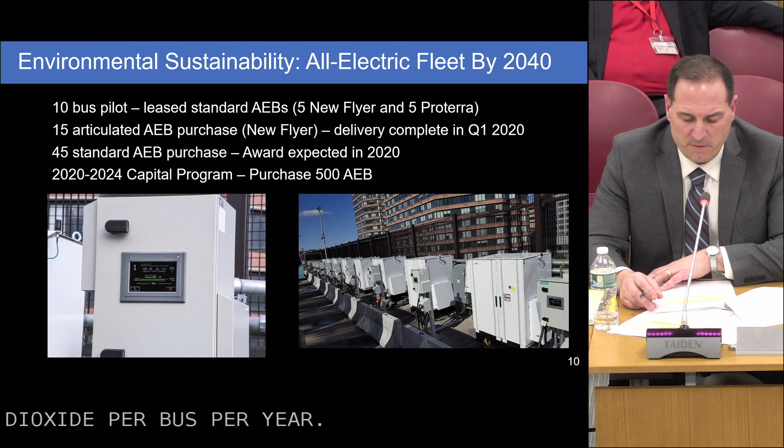We are investing $1.1 billion to purchase 500 electric buses and modify depots for electric bus operations. From 2029 onward, the MTA will only purchase all-electric buses.

By the end of the new capital program, 90% of the fleet will be equipped with digital information screens, 95% will have Wi-Fi, and 82% will have USB charging ports.

We're also working with the Senior Advisor for System-Wide Accessibility in making additional accessibility improvements. Examples include improved seat configurations, providing better options for customers with walkers and strollers, and we have implemented a proof of concept of hearing induction loops assisting customers with hearing aids.

I'm happy to report that of the 1,776 buses funded in the 2015-19 program, we have completed delivery or awarded contracts for 96% of the plan, with only 4% remaining for award.